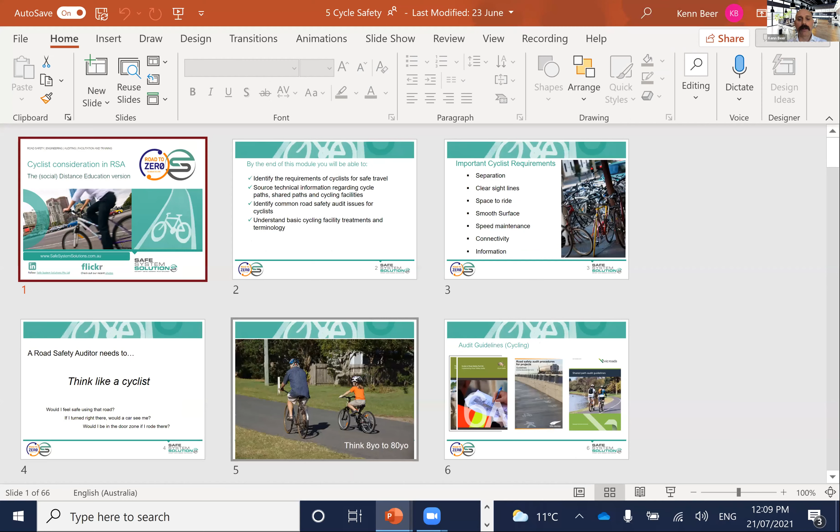Okay, I better share my screen, and of course I'm going to be asking you questions as we go. Let's start with cyclists, shall we? Right, Kathy, hopefully you can see that.

Yes, you're all good. We got a glimpse at your inbox there as well, Kenn. That was exciting. Oh, really? Yeah. 2,000 unread emails. That's good.

All right. So each of the road users, we follow a similar theme. So Austroads actually a while back set a road safety audit course syllabus, what should be covered. So we tend to try to follow that, and we tick off different road user groups in terms of the requirements of that road user group for safe travel. So requirements of cyclists for safe travel, technical information regarding cycle paths, shared paths, different cycling facilities, then into those common road safety audit issues for cyclists, and understanding the basic terminology and treatments for cycling facilities.

Now, I probably should be saying people who ride bikes, which is apparently the term we're meant to be using these days, rather than cyclists, to more humanize people who ride bikes. But it's entrenched in me to say cyclists. So forgive me if you're one of the people who's pushing for that term to be used, and I'm using cyclist.

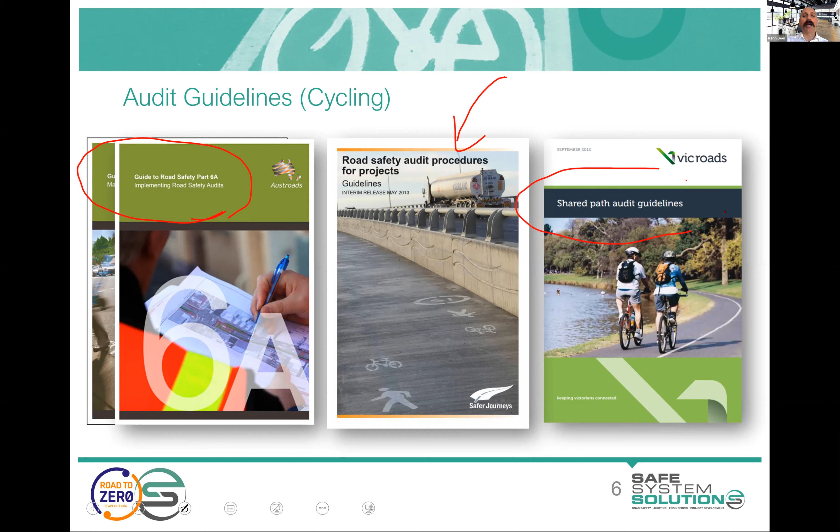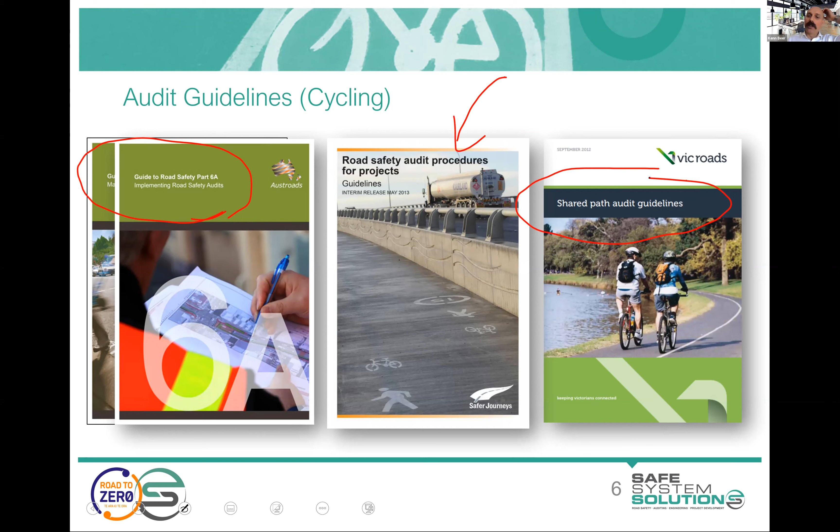In the checklists and different lists in the New Zealand document, there's information on cyclists. There's a document out there which not many people use or know about, but it's this shared path audit guidelines, which was a VicRoads document, a little bit old now, about 10 years old, but still contains some pretty good information dedicated to those shared use paths, those separated facilities, and how to audit those.

Oh, there's a wally that's up here. Don't forget to count your wallies.

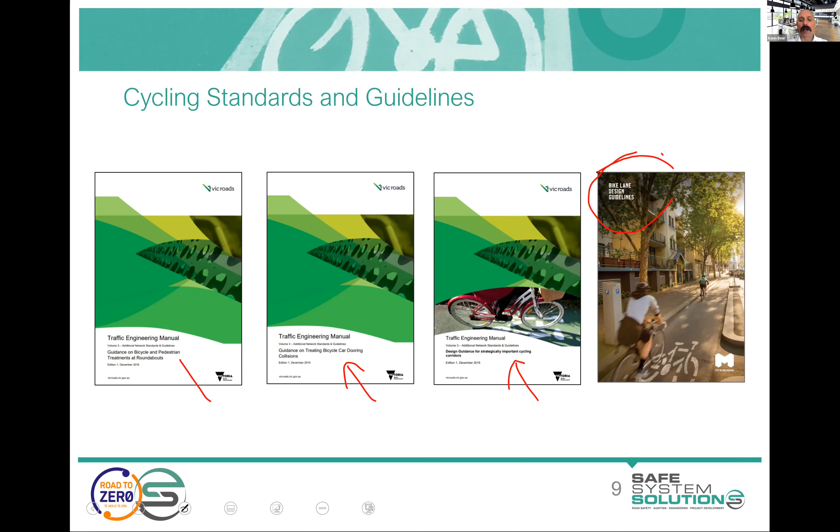There's lots of different resources, and we've put a lot of these on your memory stick and into the resources in Moodle, so you can have a look at them if you're interested. This one's bike treatments at pedestrians and bikes at roundabouts, car dooring treatments, so those areas where the doors are there. This is strategically important cycling corridors and a bit of thinking around that. Bike lane design guidelines from the City of Melbourne. There's quite a number of those that have appeared in recent times.

So we put them all in there. You can have a look at them, and no doubt there's some New Zealand specific ones that I'm not aware of, but it's luckily an area where we don't lack the guidance and the knowledge, and we're continuing to work on it.

Okay, when you're road safety auditing and you're thinking about cyclists, this is sort of the absolute 101 cycling infrastructure audit: longitudinal grates. Now, it's a bit of an existing conditions one, that you might notice in the existing conditions, and they don't appear to have any plans to change it in the design, or you might be doing a pre-opening / post-opening road safety audit, and these are the things you want to pick up.

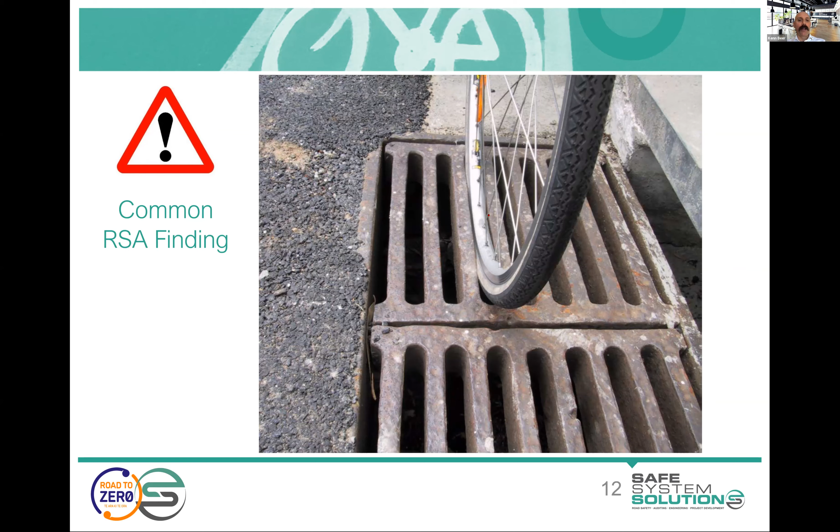Okay. And yes, as I said, there's some larger ones out there. So certainly something you could very much drop a wheel into. I'm straight into the examples here. So another common road safety audit finding is where there's new cycling facilities going in or a new cycling treatment. So this one is adding some different cycling storage boxes at the front, some threshold treatments to try to slow turning riders, some green paint to warn road users.

The issue, as an auditor, that the team picked up, was that they were proposing cycling storage boxes at the front of the queue here at this T intersection. And when you get out there on site, you discover that they operate the signals with the right turner out and the left turner in at the same time with a left turn arrow. So what we had there was that the cyclist would come down, this is what we imagine.

They'd store there to go forward, so they're in view, the drivers can see them, but unfortunately then the green arrow would pop up. Now this became quite a challenge to risk rate. We had a bit of debate as an audit team. How do we risk rate this?

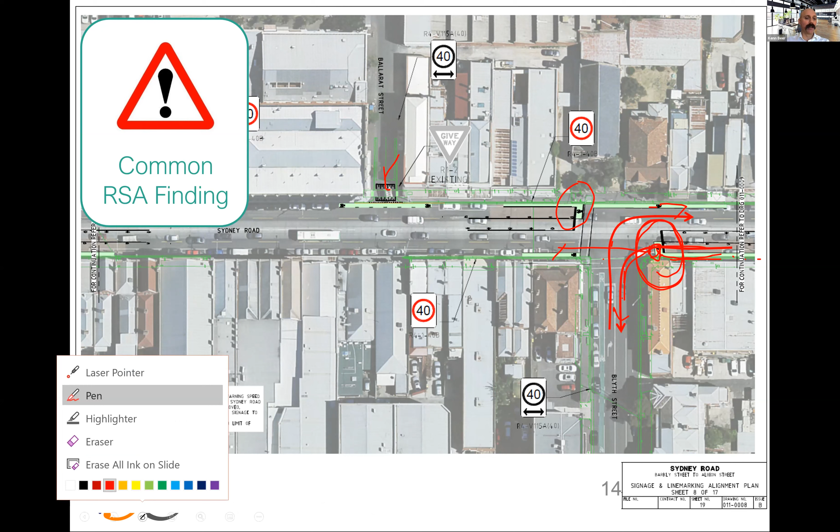And I think we agreed on a medium risk, because we decided it was pretty unlikely that a driver would not see this rider that's sitting in front of them. Maybe there's a bit of interaction as they come up and they slot in and the car's going. So that was our concern. We thought that a road rage style incident is more likely there, where there's a cyclist sitting in front and they've got this storage box and then somebody wants to turn, and that may create some dangerous maneuvers.

But trying to think that through was a challenge. I think there's a question there: is that a left turn only lane? No, it's a straight and left. So that adds a bit of comment. If it was a left turn only, then yeah, I'll show you later. You've got some options about either putting the cyclist into the middle or thinking about a holistic treatment, which is very challenging in some of these constrained environments.

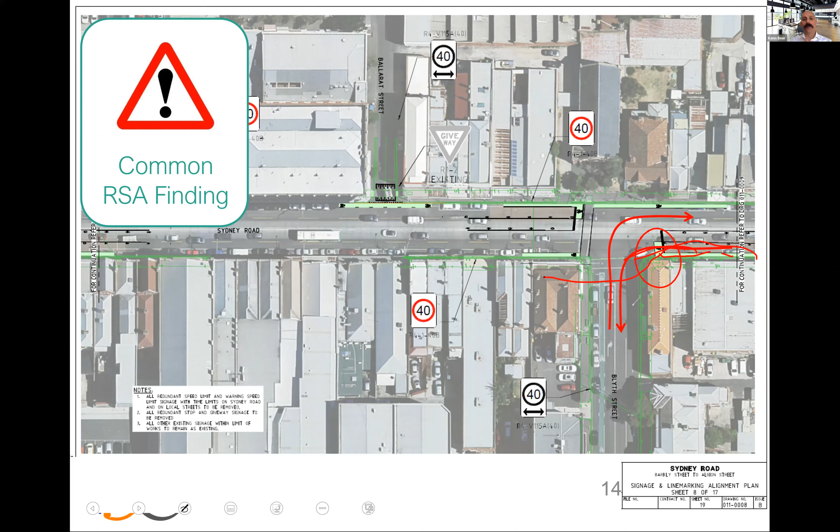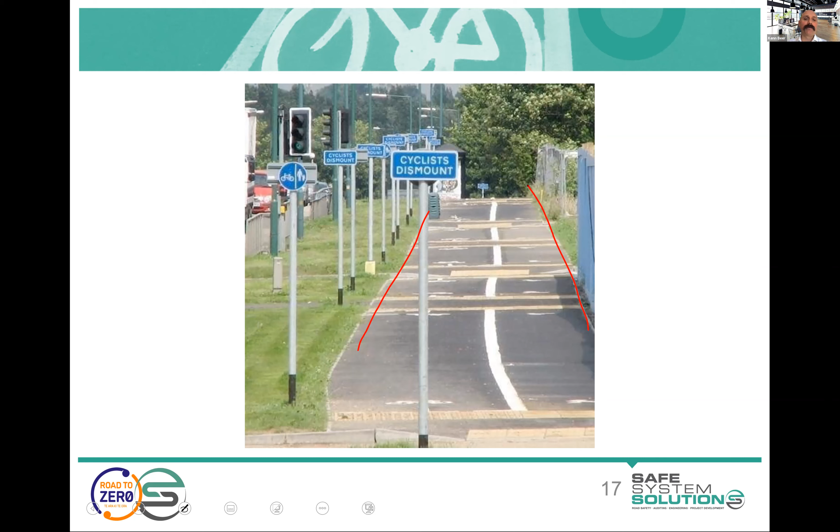So opening up those sight lines often means that there's not that requirement. You're not as concerned because everybody can see each other. The appropriate vehicle can give way.

Here's an example of a road safety audit report I did with some colleagues on a very large new subdivision being built. They provided a shared path right up onto the property boundary, which was an interesting way to go about things. Probably if that had been audited at an earlier design stage, there might have been some commentary around that.

But there were these situations with high fences and garages, and so you're going to have the cars emerging. So obviously cyclists coming down here and vehicles emerging. It's an issue. So in that situation, we would love to talk about providing that space, but cutting back the fences so there's open sight lines is a rectification measure. We call it a supporting one because it's not eliminating that issue, it's reducing the likelihood that it'll happen.

This was a really interesting one, another window into road safety auditing. The council, the local government responsible for this whole subdivision, had approved the developers' plans. I can't remember what they call them, but their standards and guidelines for subdivisions like this allowed this. And so they got this audit report and handed it back and said, listen, that's part of our structure planning guidelines, so can you remove that out of your audit report, please? It's not what we're looking for out of this report.

Yeah, there's some comments that the UK uses cyclists dismount signs like confetti, maybe a bit like that picture you showed earlier. And Lisa brought up that in Queensland they had banana rails to keep cyclists from darting onto the road, maybe around 2002 to 2008. I've just looked up banana rails, and they're no longer in use. They were bright yellow railings shaped like a banana to slow bikes down. But Mark's saying perhaps the risk is cyclists will run into the bars, doing themselves a serious injury.

So there you go. Yeah, and that's right. There's been a lot of evolution of how to treat a cycle facility on approach to a road, and certainly the use of chicanes and bars and those sort of things is very much being phased out, and either looking to provide the continuity for the cycle facility or providing essentially a splitter island like a road and clear visual guidance for the cyclists to understand that they don't have priority. But yeah, the bars are not.

Yeah, so Kevin's responding that they're still used in Napier. Okay. Napier, the home of the banana.

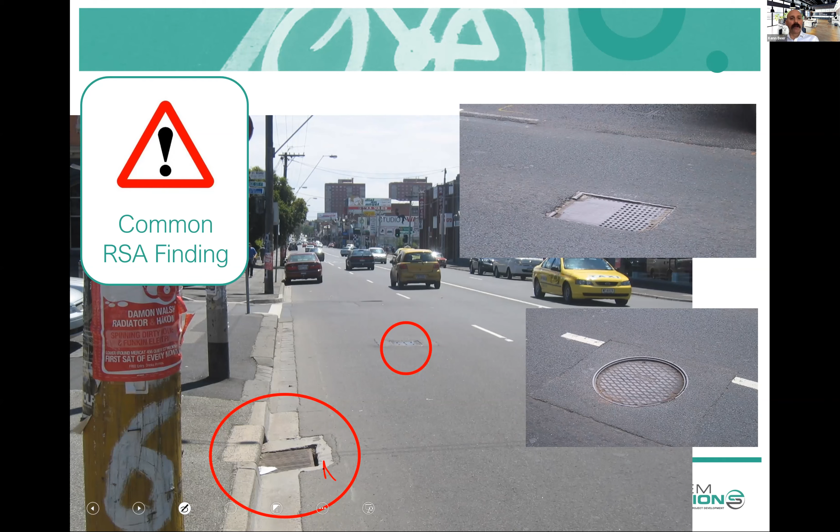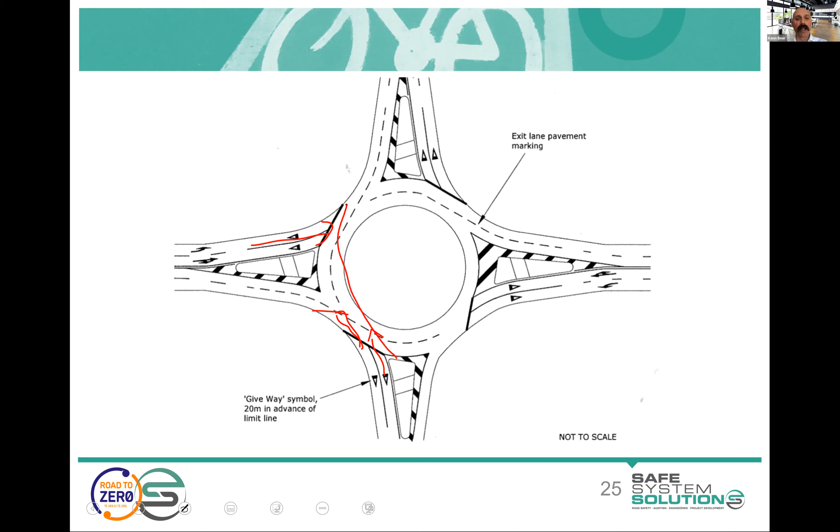So take this one all the way back to a planning perspective and try to create your cycling routes away from these major traffic routes. But we do find ourselves with lots and lots of legacy challenges. There's more innovative concepts, more of that attempt to try to provide those facilities. These are some concepts developed by some of our designers, which we put out there. This hasn't ever been built yet, but the Queenslanders are putting this into their guidance as well to try and encourage this.

But the idea being there that maybe for the minor leg approach, the cycle path can have priority through and connect back, providing these staggered clear areas slightly away. So a right turning cyclist could come in here, go up, pause, cross, pause, and off they go.

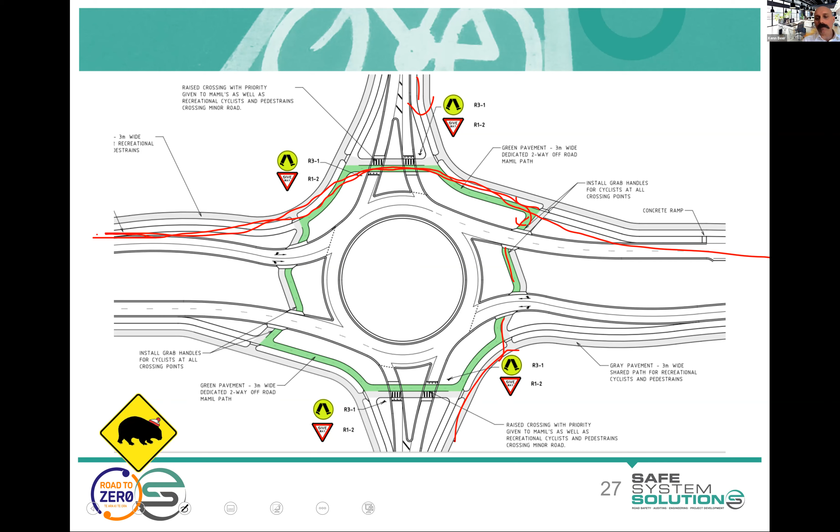So again, as an auditor, you're providing advice maybe on possibly delving down these treatments or thinking about cyclists and how they're going to go.

Any further questions come up there, Kathy? We had a comment about the sharrows. They're being installed in Hamilton City in their CBD. I think I've got that right, Janine. Just let me know if I have it. And that's about it. I'm just waiting to hear back from Kevin on a roundabout that he's mentioning. But okay, that's it for now.

Yep. Yeah, so the sharrows are an interesting one. You really do want to ensure that the speed of vehicles will be low if you're putting those sharrows in. So maybe the need for local area traffic management. I did see sharrows put in on a sort of 50, 60 kilometre per hour point on a road, which really I think is causing us a bit of concern if you're going to get cyclists claiming lanes at those sorts of speed. It was a bit of an odd scenario, but anyway.

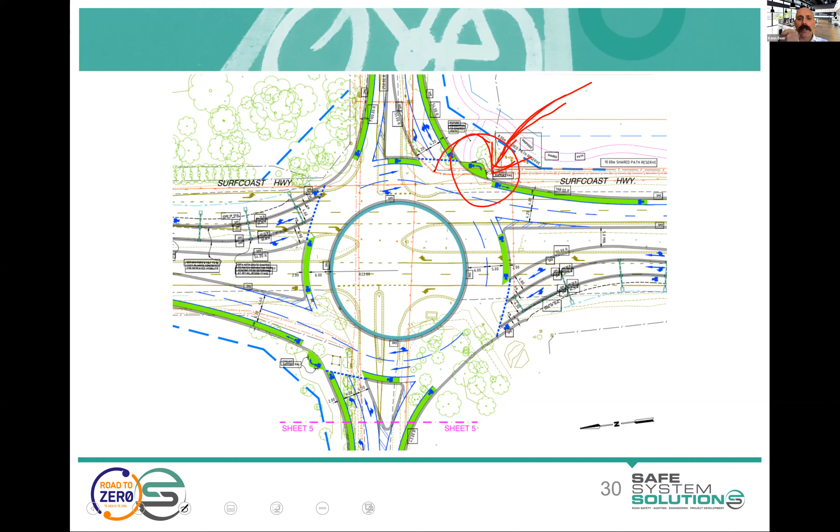Here's an interesting one, again showing the design to reality challenges that are often faced. This one, another 2-lane roundabout, and we've got the cycle lane. It's really just the shoulder comes up, but then a dedicated cycle facility for the riders going straight through, and so they're separated from all the vehicles in the roundabout, and so it all looks fairly good, well catered for. I mean, the right turn has still not got anything particular there. And then this is how it was then constructed.

And I think as a cyclist, and again, as an auditor you put yourself in the cyclist's shoes, I kind of feel that you're going to get to that and think that that's the footpath, and then, okay, I've got to go through here. So the whole purpose of that facility, the extra money and the investment, I don't think it's going to get utilised a huge amount. Yeah, they've got the cyclist only sign, but it's a little sign there, and you're riding along and off you go. So I think just a nice small bit of green paint up there would have done quite a good job to show that that is an area for cyclists.

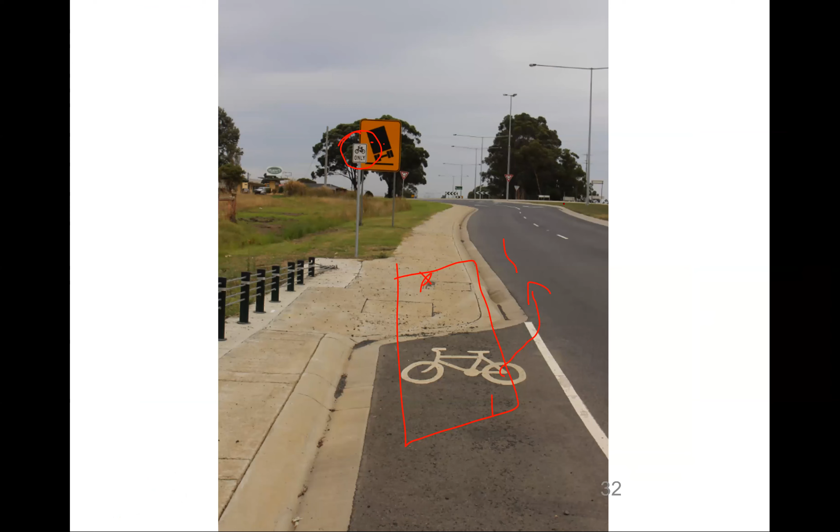Kathy, anything? Some comments are about the previous one, that it would always be covered in glass and gravel. Roundabout on that crest, that's poor practice. Not wide enough for pedestrians and cyclists, the previous slide. Yeah. And Daryl wants to know, what's your view of the classic trolley problem? Does increasing the safety of a majority justify a small increase in the risk to the minority?

Such a good question. And the easy answer, no, you try to get everybody to have improvements in safety, so you don't have a road user that loses out as such. But yes, there are practical challenges on that, and I do favour the safety of the majority, but always look for measures to try to ease the risk for that minority, and try to maybe provide facilities or restrict that minority. But yeah, that's a debate for a coffee or a beer or something, and a long discussion.

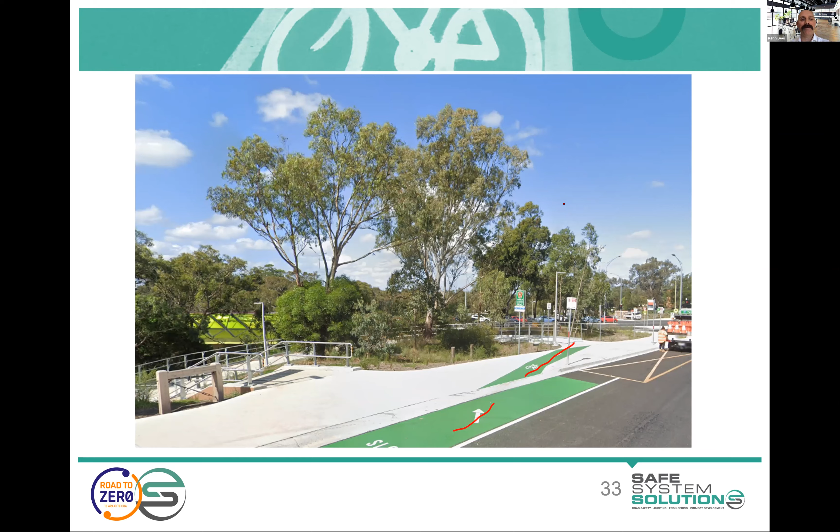Okay, dooring. Dooring is the term that's sort of raised its head over the last decade or so, as it's been termed that opening the door in front of a cyclist and the cyclist striking the door, or striking or avoiding and falling into live traffic. And that's where more of the injuries have happened, in the secondary strikes, rather than that initial door hit. But the door hit itself has provided quite a bit of serious injury.

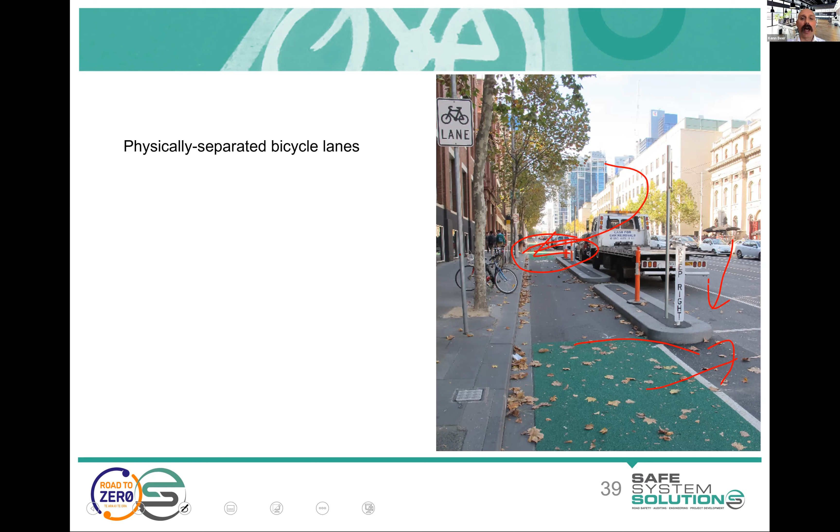Yeah. So the separated cycle facilities are interesting ones. Great improvements come with a number of challenges we need to work through, and auditing is certainly a great way to sort of highlight these issues. That turning in, the idea of disabled parking spots and ensuring that they are correctly catered for, the loading and unloading areas of goods for cafes or the like, and vehicles coming in and out.

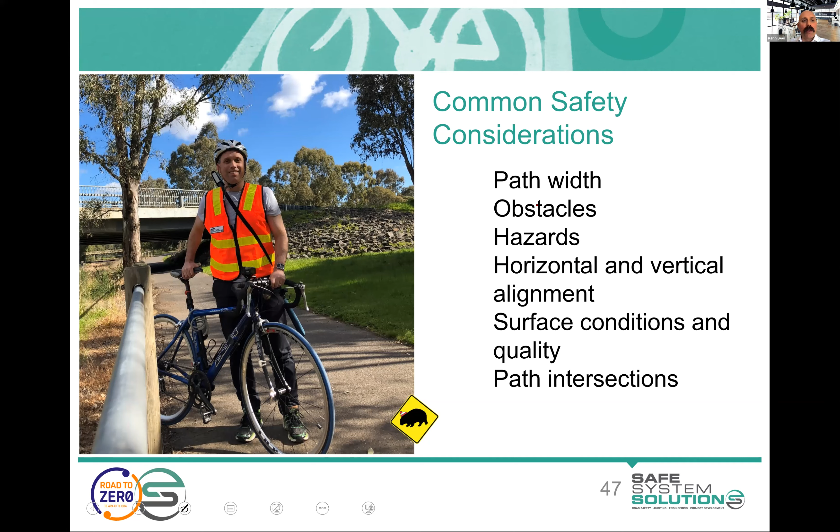So those intersection principles to think about in shared paths, and Kevin's award-winning fact sheet also talks about intersections on shared path interactions, and that was great to see. So have a read of that when you can. But you do want to provide that clear priority, good sight lines, advanced warning, the guidance, and then ideally getting to that 90 degrees, so we don't have that Y intersection challenge and confusion of priority and sight line, being able to see challenges and speed reduction.

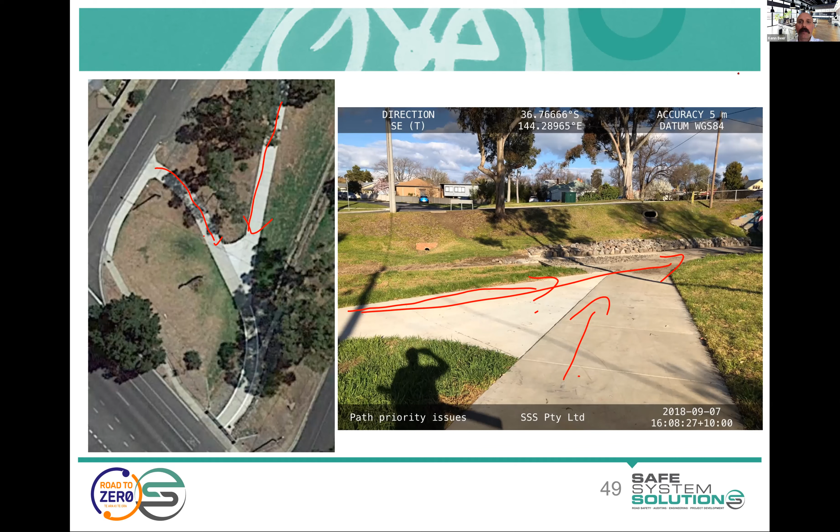Okay. Thank you. I better keep moving along, eh? Yep.

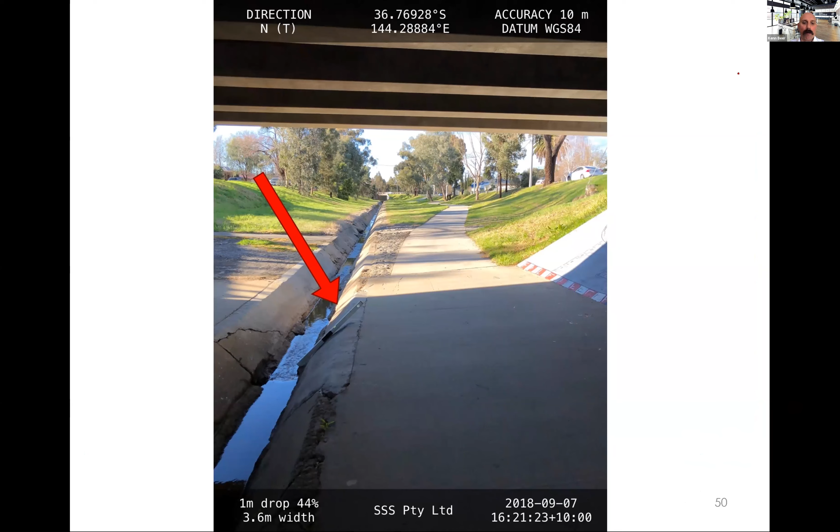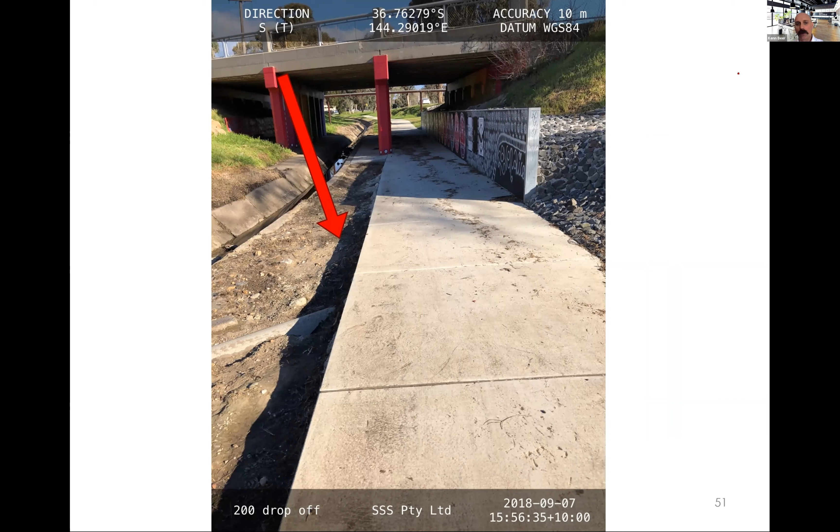Lots of examples here of different issues for cyclists, drop-offs, smaller drop-offs, but nonetheless, you've got to think about people walking dogs, kids on the path, all sorts of things that might make a cyclist have to avoid, and even hazards close to the edge. So there's quite good guidance out there on what's generally appropriate and what reduces risk, and how much we can reduce risk. Thinking about areas within the general path that could be a hazard at night as well, and of course debris and the like.

Fencing and catching a foot peg, a pedal or a handlebar. So there is specifically designed cyclist-friendly fencing. So just ensuring that is being used is important and something to pick up as an auditor. The back of barriers often causes issues for riders. Again, we've been doing some different investigations of incidents, where you'd compliment them on thinking that a barrier should go in there to separate the path from the vehicles. But you do need to think about the back of the posts for a rider that may strike that.

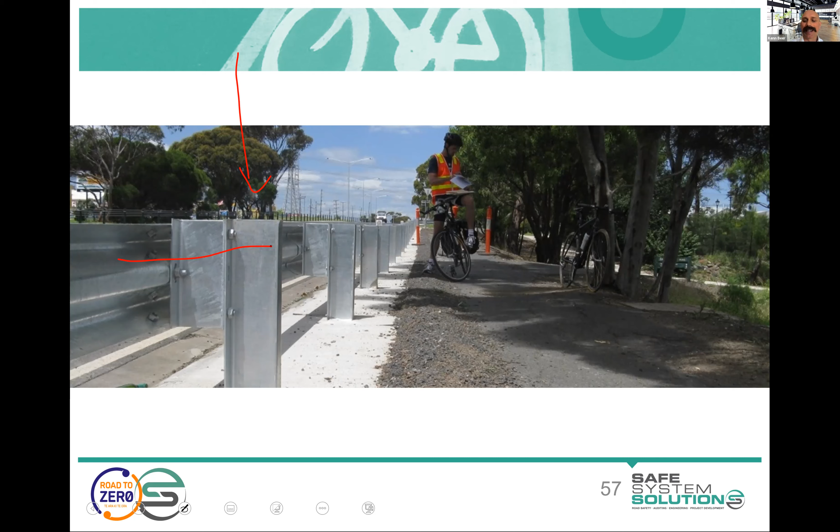And there are ways to treat that. You can put a back-to-back W-beam system on there. You can do post capping; there are lots of post capping products available. So there are things that can be done and suggested as a road safety auditor. There's some back-to-back examples, and cyclist-friendly fencing also.

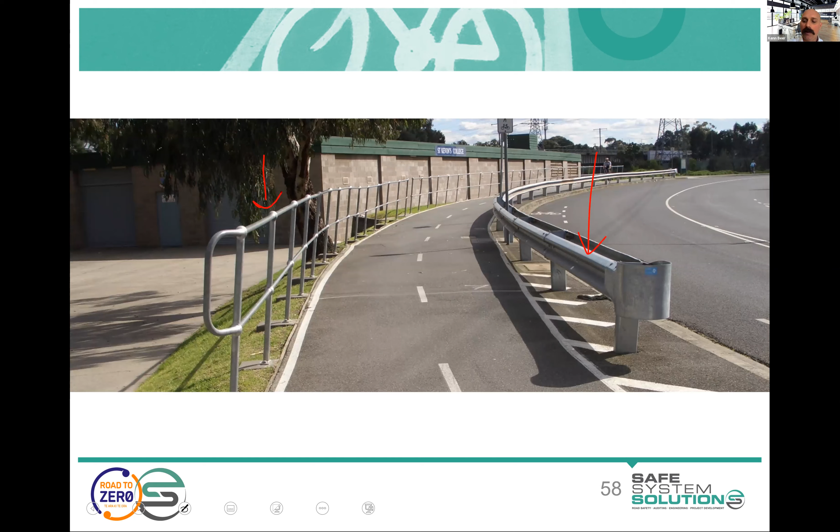So we talked a little bit about putting hazards intentionally in the path, and this is not great. Think of that at night. It's not going to be seen. The chain's not good. Somebody's probably put that there to warn other cyclists at night that there's a chain here. So we want to try to make sure we're not doing that.

I think this is quite a good example as it comes up on your screen here of there is a cable stay there, so holding up a power pole. Ideally, we wouldn't have that in the middle of the path, but if it has to be there, good line marking, some advanced warning, flexible bollards with retroreflective marking. We're in a better situation here.

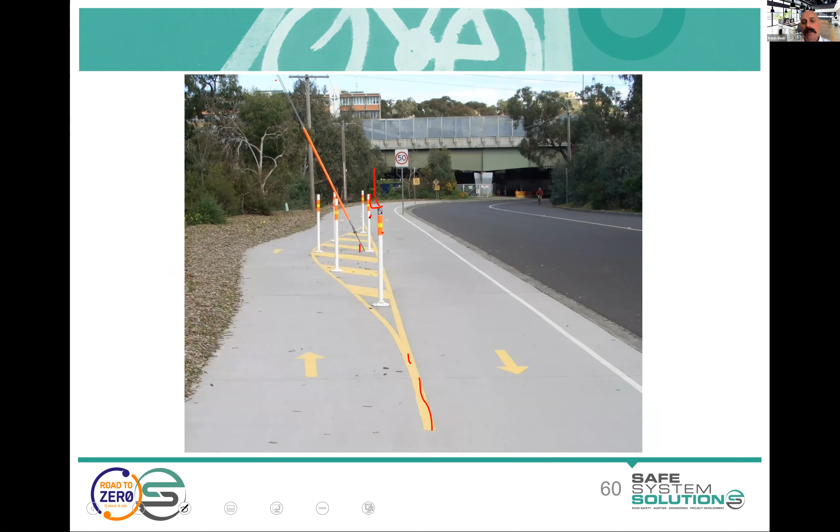And Austroads' guide, certainly the new one, is going to have these thematic road safety audit sheets in it, which we came up with to provide that guidance on. If you're asked to do a cycling audit, like a road safety audit with a cycling focus or a motorcycle focus or a pedestrian focus, what are some of the key differences and how do you do it? So we put those into your memory stick, your USB, and onto Moodle, so you can read those in your own time if you'd like. They've got some more information.

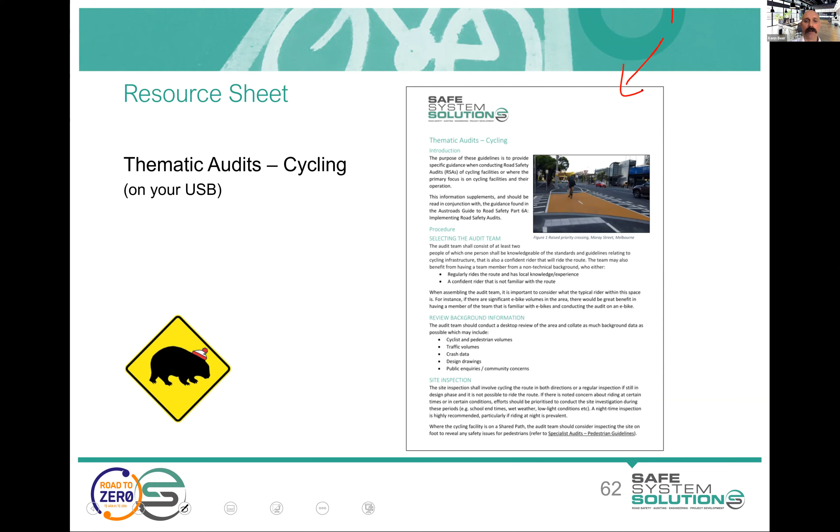Okay, Kathy, anything come up that I need to deal with? Are we going to have a quick break? We are going to have a quick break because okay,

this is about is it compulsory to wear a helmet on a separated facility in countries where helmets are compulsory on the road? Yes. And I believe Mark sent through the legislation on that, so I won't read all of it just at the minute, but I think the short answer is yes.

Yep. But yes, let's have a quick break. And so what do you say, 2 minutes? Quick break, because I got to get through motorcycles and then we've got to explain the activities. Yes, great. 2 minutes. Right. 2 minutes. Thank you. Thank you. So I'm just reading through some comments there. Yeah, some good comments on the details of some of the examples and a few other things. So thank you for that. It's a bit of a challenge online, you want to have a bit of longer conversation on different topics. Nonetheless, let's keep ticking along here.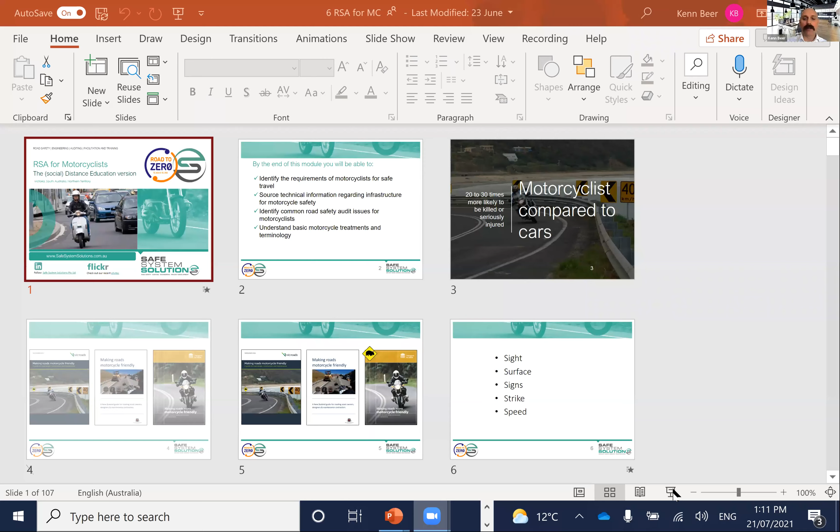I'm going to share that, and we're going to jump into motorcyclists. And again, one where the New Zealanders have done quite a bit of work over the last decade at least in terms of upskilling engineers, traffic engineers or designers in the needs of motorcyclists. And that's been a wonderful thing. Some of this you'll probably have seen through different presentations or through the Making Roads Motorcycle Friendly documentation that New Zealand has. But we're going to again talk about the requirements of motorcycles for safe travel, technical information regarding the infrastructure, common road safety audit issues, and the basic treatments and terminology.

A motorcyclist is 20 to 30 times more likely to be killed or seriously injured, depending on which bit of research, in comparison with passenger vehicles. So certainly the most vulnerable road user from that perspective.

And here are the documents available to try to concisely talk about infrastructure for motorcycle safety. So this is the VicRoads one, which I developed with some colleagues quite a few years back. That's actually the second version of it. And the New Zealand one, which came along a little bit later, that's the one that you can find on the Waka Kotahi website. And it's replicated in a few others.

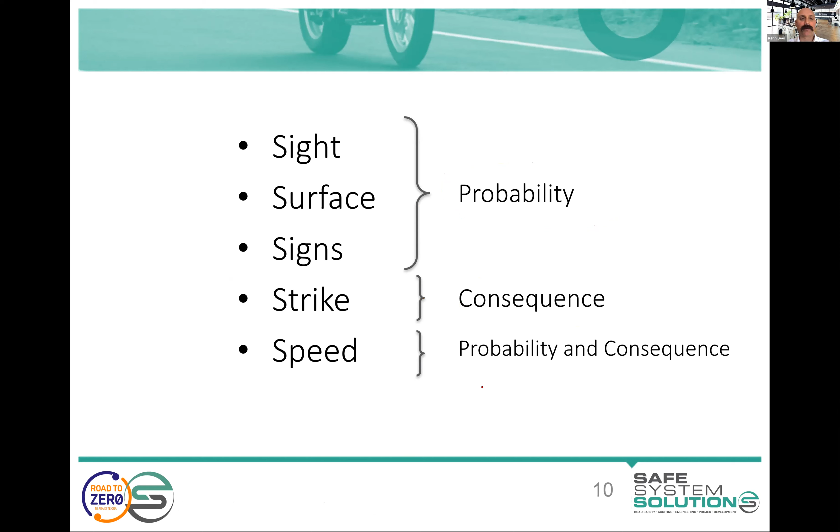You're all quite good on the risk, probability times consequence, the chance a crash will happen, how bad it's going to be. And as we categorize these, the sight, the surface, and the signs are the chance that the crash happens. The strike is that consequence when it does happen. And the speed is both. Less chance that the crash will happen, won't be as bad if it does. So I go through these in a little bit more detail in others, but I'm going to move quickly through this in order to give us time to give you that assignment.

If you're looking at the size of motorcyclists and thinking about the issues there, obviously even compared to small cars, with motorcyclists we're dealing with a much smaller size. We add some safety margins there for motorcyclists.

First one to pop into the chat, why those safety margins are quite large. Any ideas? I'm just going to pause for that. Yes. Andy's going to get that unless somebody else puts something in. Yeah, okay. We will give it to Andy. He clarified it.

Initially talked about wobble room, and then clarified it with lean angle. So Kevin was closely following with lean angle. But yeah, it's all about that lean angle as well that you need to take into account as a rider goes around a curve.

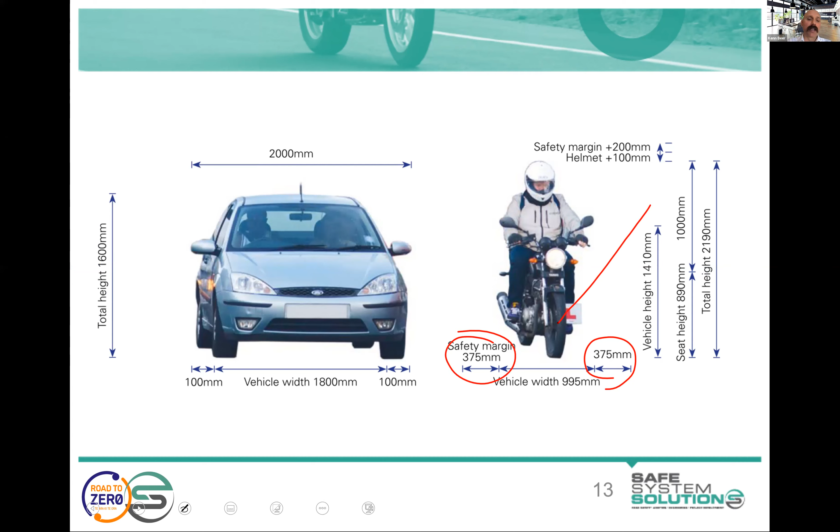Now, does anybody know? In fact, I'll give another prize out there. The person who can tell me the official name for this curve, the curve that tightens. I didn't even finish the question, and Kevin was on to that compound curve. We might have to put a hold on prizes for Kevin for this session. I think he's going berserk here.

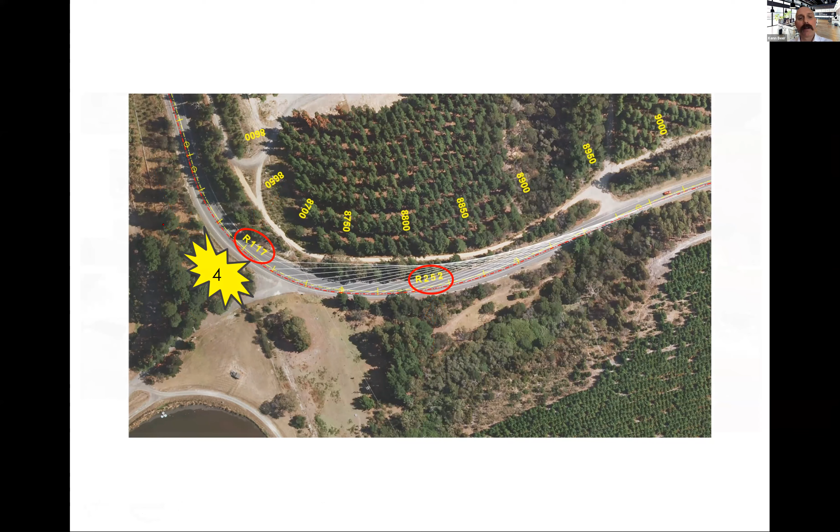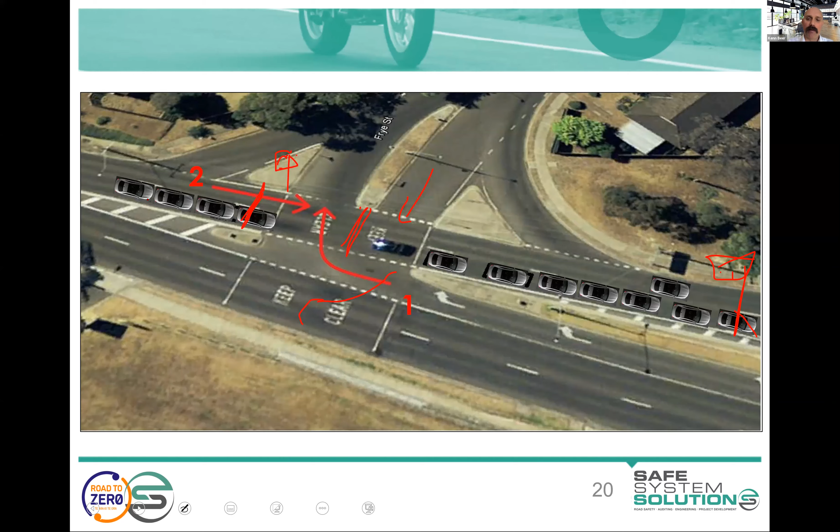Again, just talking a little bit about the motorcyclists being a little bit hard to see at intersections. Thinking about that in your auditing.

And surface challenges. So certainly the lean of a rider and the two small contact patches means that any surface issues are far more challenging. We really do like to think about the surface issues on the approach to a curve and through the curve. Once the rider's out, surface is still important, but these are the really hazardous points, in and through.

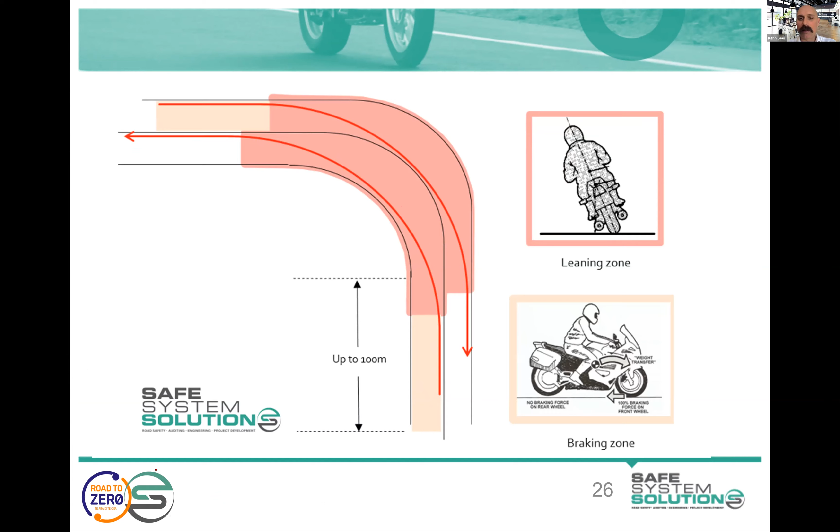I mean, I'm a licensed motorcycle rider, but I would never call myself a motorcycle rider because I'm just scared to get out there really after spending so much time dealing with the issues and incidents. But I do get some experienced motorcyclists tell me they don't like the specific lines on these, so we might have to fix those. But we do want that consistent, good surface.

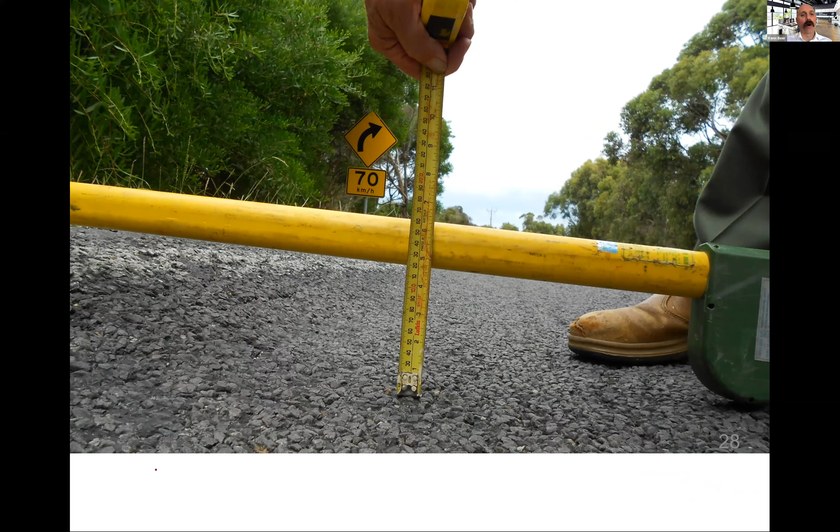So all sorts of challenges out there, though. Depressions in the road can mean that a rider may just lose their traction as they sort of bounce through a depression, especially on a curve. Different potholes and different things, especially around curves, are challenges. Just showing lots of photos of roads that are absolutely stuffed there.

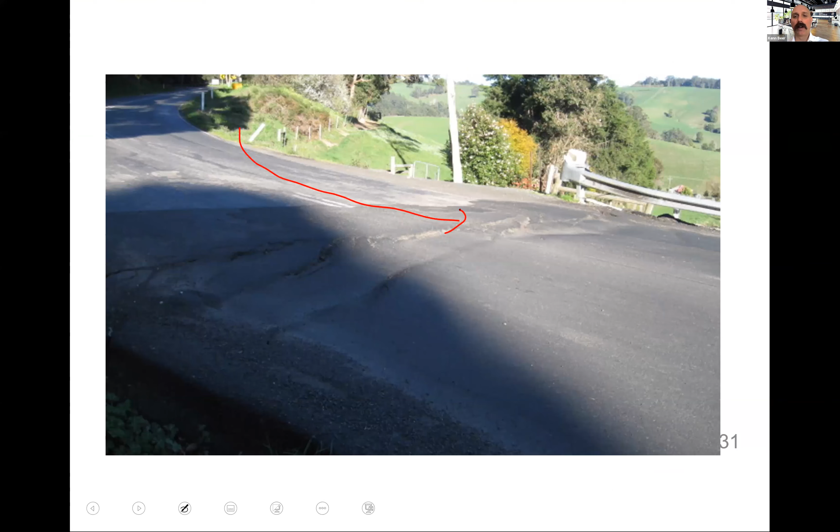Thinking about gravel wash, mud that washes out onto the road from work sites, construction sites, and thinking about that for riders: scooter riders, cyclists, motorcyclists, all are going to be more susceptible to those surface irregularities.

Thinking about patching and maintenance works and how they're done and where the seams are in the joins, often we're finding that the patches will start to break up around the edges, which is right in the line for a rider. So ideally you do full width patches, but there's some cost challenges there. And this one, as a rider comes around on this very popular motorcycle route, they encounter this. So we need to try to get them right in the first place so they don't break up like this, but warn riders until it's rectified with lots of signage, lots of warning.

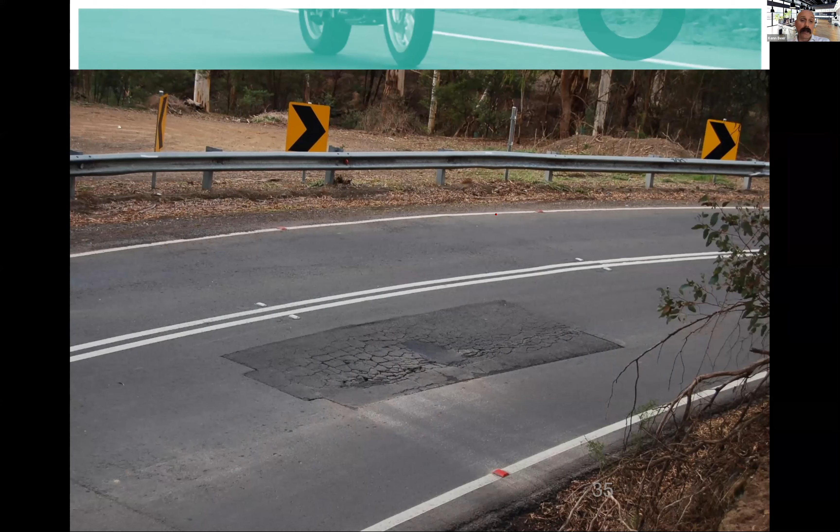Steel plates get slippery. Looks very obvious to us with this nice photo, but you think about that maybe at night when the rider's following a truck or something. Maybe it's raining. They may not see it until they're on it and hitting it and sliding. So they can get skid resistant surfacing. You can get higher visibility surfacing, and it can be a bit better. This one's interesting. Looks like the pins are coming up, the bolts.

So obviously the surfacing, you can do lots of things, water blasting, different surface treatments over the top. Here's one which is improving the surface skid resistance on the approach to the intersection, through the intersection where conflict is more likely to happen and riders are trying to avoid or brake hard, but not so much on the bit once they're in a lower risk area.

And sealing right up to the barrier is desirable. Certainly a rider going too fast in hits an unsealed surface, they really have to pull the bike upright. That's their only option because the traction is lost. So sealing right up to barrier for motorcyclists on popular motorcycle routes is quite important.

A comment came through about an interesting issue that was found on a popular weekend ride around a peninsula. If ridden in the anti-clockwise direction, motorcyclists are always on the inland side, therefore subject to debris from cliffs or steep driveways sitting on the shoulder or the lane. There you go. That's a very interesting specific there. You could have a road rule, clockwise only for motorcyclists.

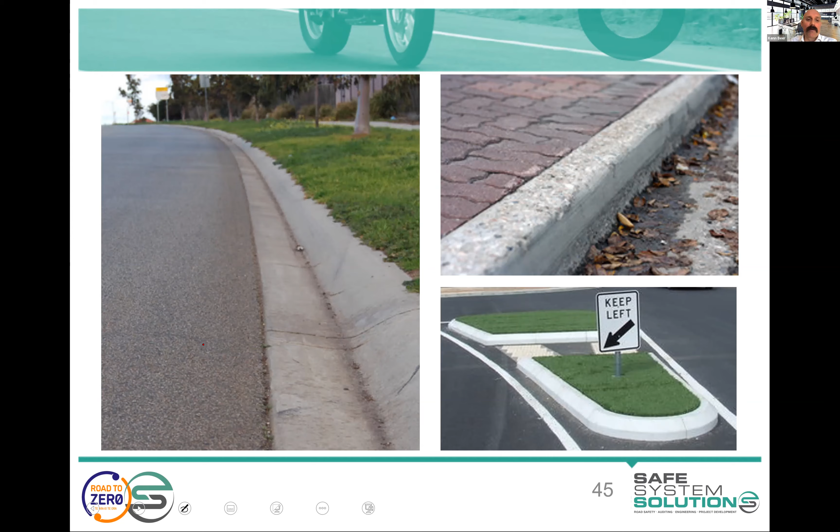Yeah, good one. The type of curbing used: obviously, the more mountable the curbing, the better for motorcyclists, although we do need to use different curbing in different scenarios for drainage and the like. But if you can make it more mountable, it is better. Here's just a little video. I think the roundabout here is quite good, quite well highlighted, but it shows how small a lip can destabilize a rider.

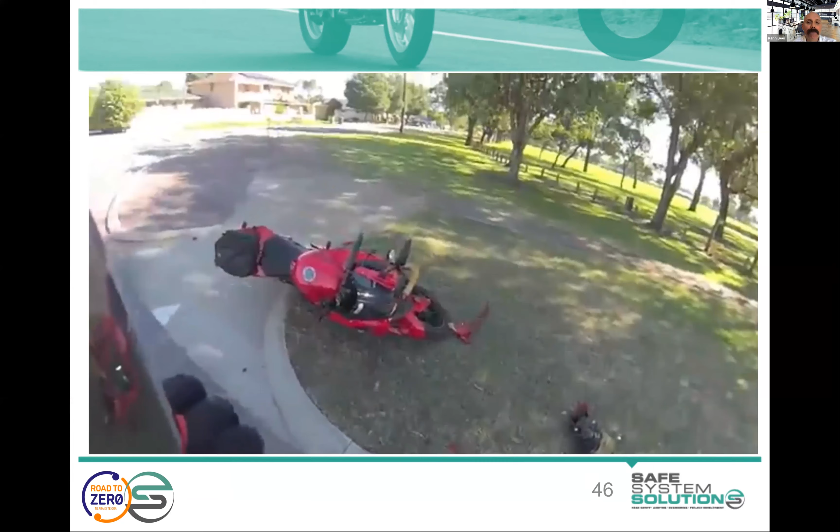And then they've gone into the grab rail there, and yeah, just those very small surface changes destabilize riders. Now there's inherent challenges with motorcyclists. Very small little mistake there, and everybody's making mistakes, but you can see how it can start to escalate. Luckily on that one, obviously no injuries, but you can think how bad that could be.

Surface, so line marking: large swathes of thermoplastic line marking become slippery. And I can almost guarantee if you get into doing lots of road safety audits, you will see a design that'll come across to be audited where they want to paint a massive stop sign or give way sign right at the intersection because there's been crashes, overshoot worries. And the idea is nice, but the reality is we're now providing a big skid resistance issue or a slippery area right at the point that's really critical for a motorcyclist.

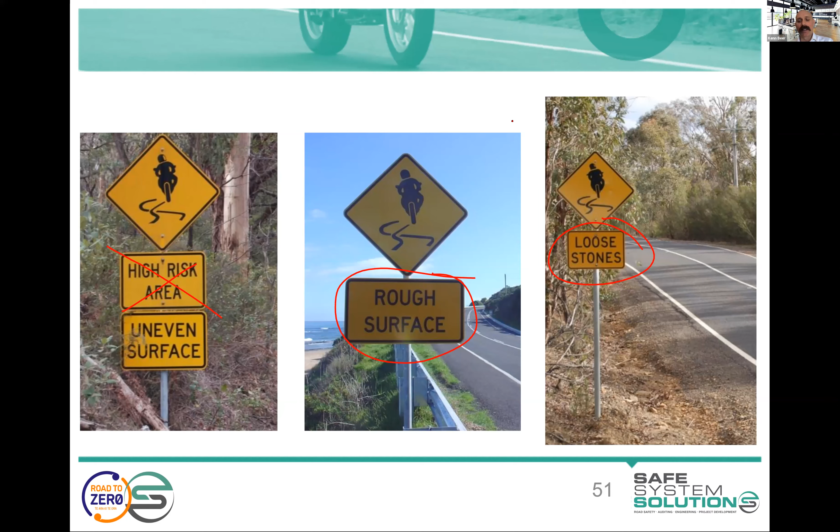If you can do it, you want to ensure that you're using skid resistance tape or line marking. The challenge is over time that wears down and polishes up and becomes a bit slippery. But I think that roundabouts are a safer area for motorcyclists, not as safe as they are for passenger vehicles for a number of reasons, and surface is one of them. But I still think that it's probably the right thing to do in a lot of circumstances for everybody's safety.

Okay, let's talk about strike. Moving along quickly, and Kathy, if you can bring up the Word document and 2 PDFs to be prepared for the explanation, that'd be good.

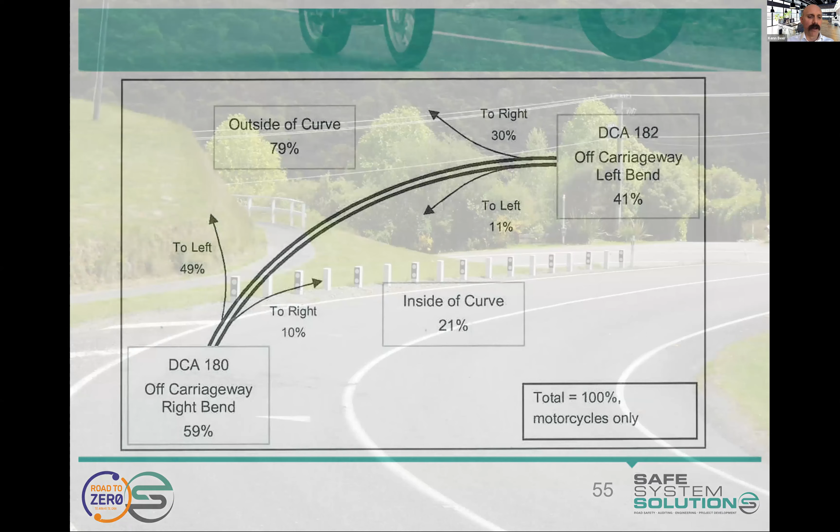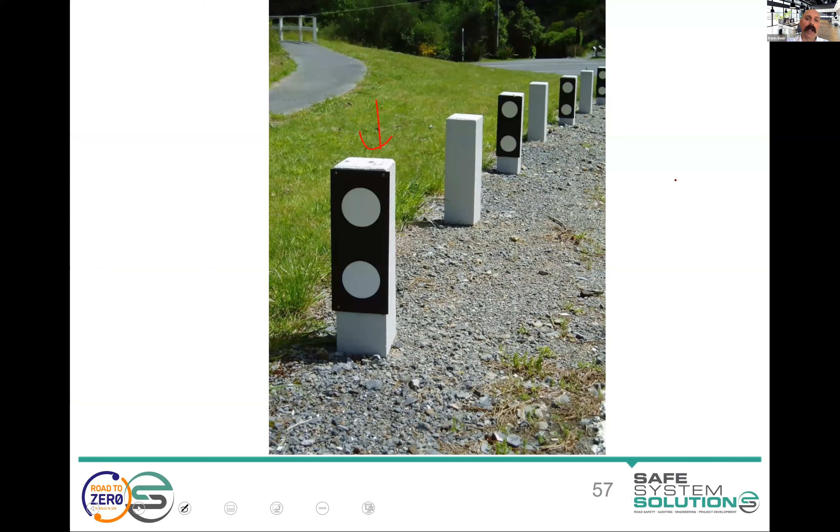riders. So we need to think about what we're putting on the outside of curves, and all the galvanized steel posts we have out there. They're all deemed frangible for a passenger vehicle, but if a motorcyclist hits it, it's easily strong enough to kill the motorcyclist. So you've got to think about where you're placing signs. Do we need both of these signs? Could we do one in the middle, lower the risk?

And then maybe on popular motorcycle routes, providing some of the more flexible sign ranges available. They usually come with maintenance challenges or cost, but we've got to think about it. But do you need some of these signs at all, like that one? Would be a question to ask. And here's one of the many low mount products available. You can have a look at that.

But as an auditor, you're going to want to know a little bit about, is this a really popular motorcycle route? And so should we be suggesting that, or is it for low volumes of motorcyclists and we maybe don't need to suggest as much of that because the risk is lower? Thinking about road furniture close to the road, and thinking about riders leaning and the like. There's a staged photo of a motorcyclist leaning around this curve to show that they lean in there.

And of course, in terms of that roadside, we like road safety barriers to protect road users from hazards in the roadside, but obviously they are designed specifically for cars, not motorcyclists. So then we can do the underrun protection, the rub rails that are available to stop riders hitting the post.

And so you can imagine sliding along at 80 kilometers, 70 kilometers an hour or something, hitting one of the posts, you're going to be in a lot of trouble if you come off the bike. And hitting a rub rail, still not going to be friendly, but going to be friendlier because you slide along it and dissipate your energy over time. And obviously these can be retrofitted to existing W beams, lots of products available.

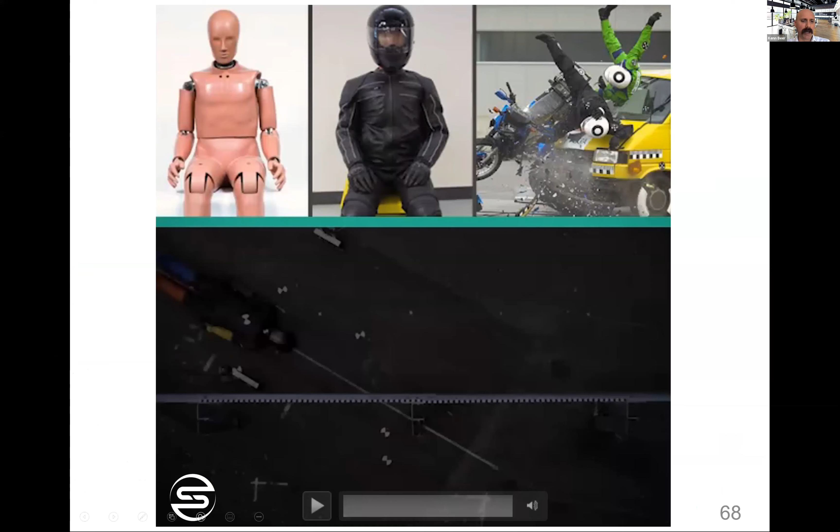And I think I showed this video in the Safe System Assessment course, which many of you did, but I'll play it again. There's a European crash test motorcycle dummy into barrier, so straight at the post, and between the posts you can see that the underrun protection provides a friendlier outcome, and the post itself, hitting that post, is not a friendly thing whatsoever. And they're at 60 kilometers per hour, not even at what a lot of riders are traveling at on some of the touring routes.

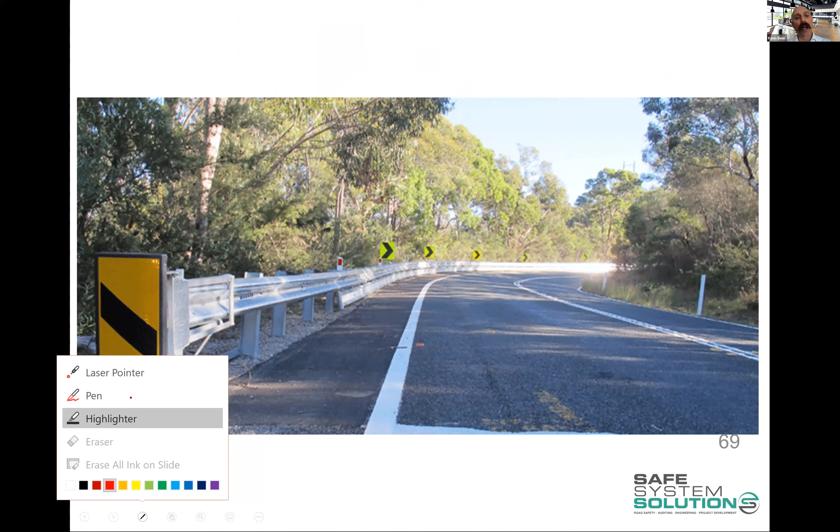Yep, so protection there. Again, as a road safety auditor, think about any times that things might be improving safety for one road user but could make things worse for another, and try to highlight those and maybe think of some solutions. So certainly, again, that's why we don't put the underrun protection on the end terminal, because it's unsure that the end terminal will function correctly if struck. So looking out for those little pieces.

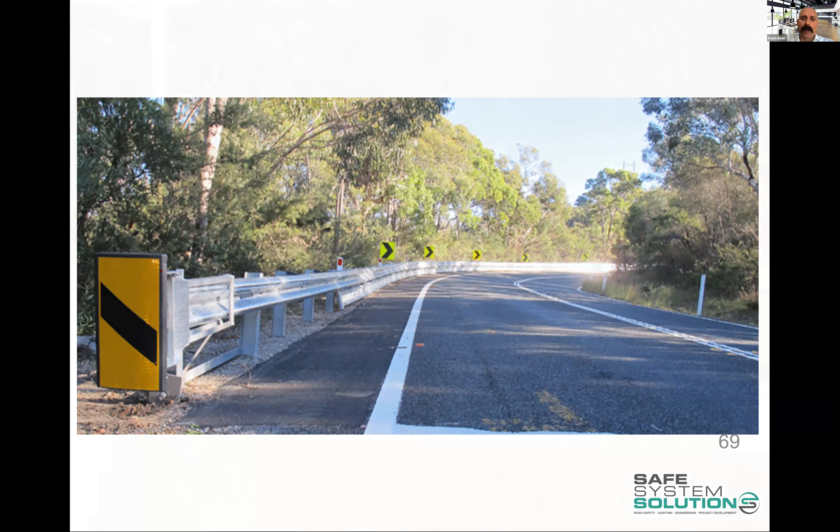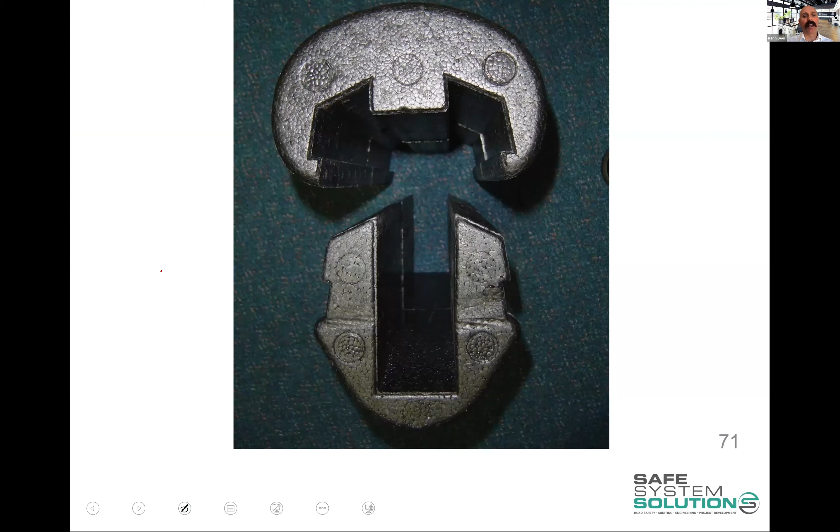The wire rope safety barrier, really generally not a major issue for motorcyclists, even though the motorcyclists will argue. And the reason for that is the positions that the wire rope is used is generally on straights or very light curves. This is probably one of the highest curved ones you really ever see. You can get post padding for these. I don't think that's actually approved for use in New Zealand. I can't remember. Somebody will be able to tell me.

But these are going to do something in some crash scenarios, but you're still trying to absorb the energy and dissipate it over a very short period. The football goalpost padding idea only works up to a certain point. The ideal would be to redirect energy along.

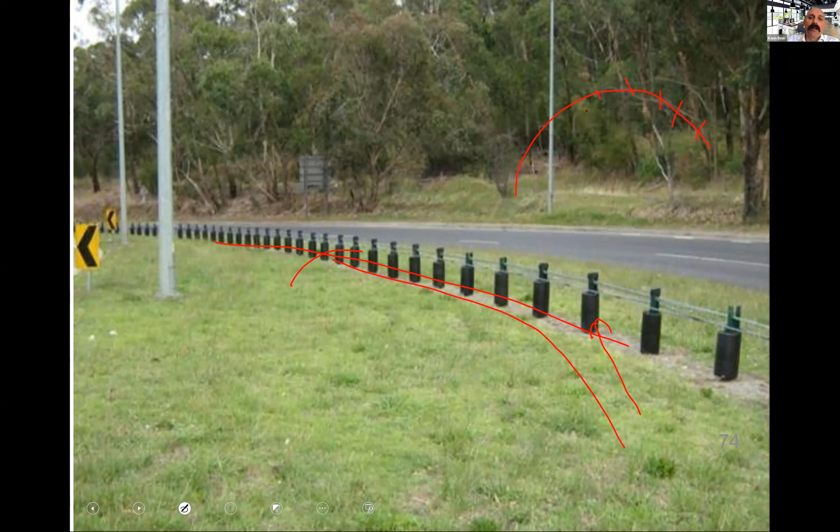But wire ropes tend to be used in long, generally straight environments, because you can't put a wire rope on a sharp radius curve, because you tension it up at both ends, it pops into the middle of the road and bends your posts over if the radius is too much. So 200 minimum, absolute minimum for wire rope systems, a 200 radius curve.

So on those popular motorcycle touring routes, you're unlikely to see wire rope systems, but we don't have any good solutions or anything better than trying to do the football goalpost padding style. And this one was a job putting in a central barrier system. This was probably 10, 15 years ago now, on the road down to Phillip Island, where the motorcycle Grand Prix is. And it does get a lot of motorcyclists going to view and watch, so it's a very popular motorcycle route.

And we were putting a central wire rope system in, and the road safety audit team suggested the use of the stack cushion around the posts. So we did that for 5 kilometres, which cost us an absolute fortune because they were $45 a unit. So you can imagine how much that cost. And that's probably fair enough. Now, if I was designing this, every time it would be a back-to-back flexible W beam, back-to-back Ezy-Guard with underrun protection every time. That just didn't exist back then. And some more examples.

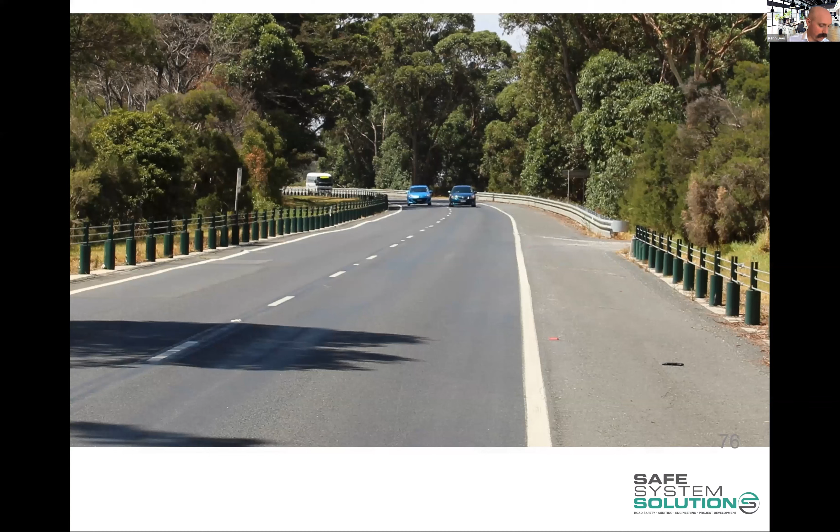Questions, Kathy? And how am I going on time?

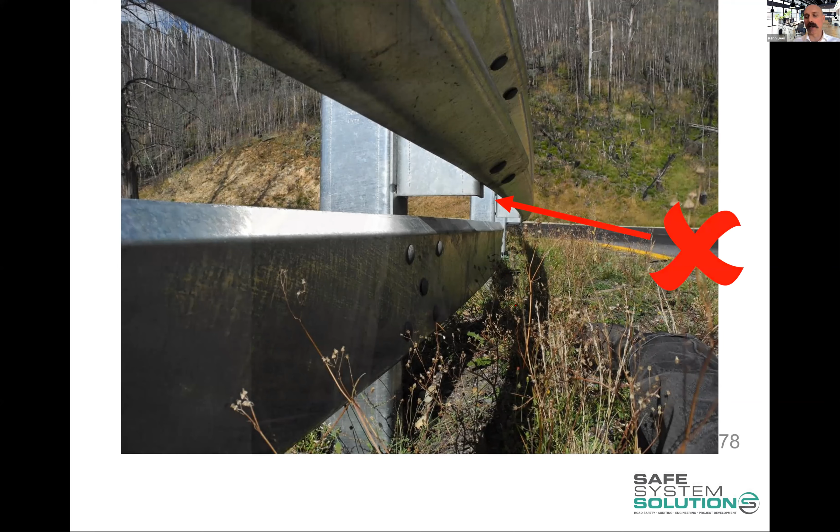Just a couple of little tips. The rub rail should sit out from the barrier system. Sharp bits and areas where a leg or an arm can get through: inevitably, the motorcyclist's leg or arm will go through those spots. So try to fill gaps underneath and think about how a rider would slide along an area. So, these aren't ideal.

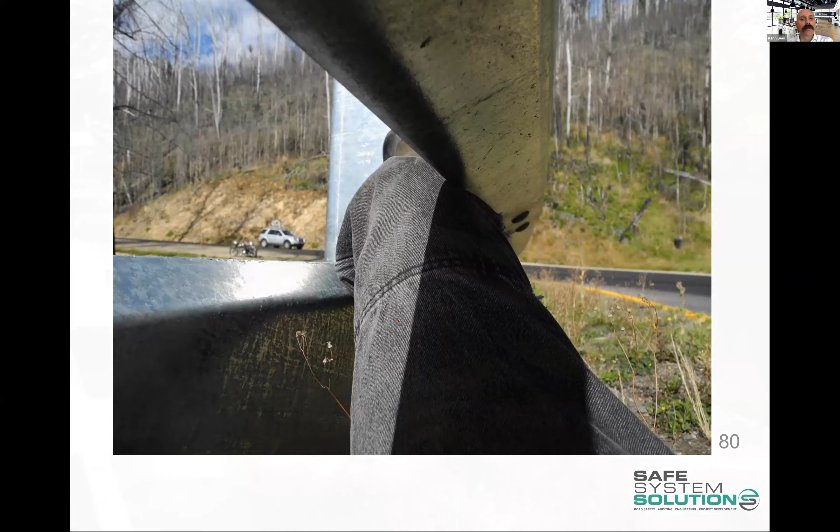I'll finish off with speed. So speed, obviously we can influence the speed of riders in a variety of ways, the same way as any other road user. But good delineation, the use of chevron alignment markers, trying to give good guidance on what the curve is coming up and how sharp it is, and helping out from that informing perspective.

The use of advisory speeds and correct advisory speeds. So undertaking your ball bank indicator runs through and getting that right. The consistency is an important one. Consistency along a route to ensure that a rider doesn't approach one 35 advisory and then the next 35 advisory is a sharper curve or something like that.

And again, motorcycle specific audits where the audit team has a motorcycle rider with them, and they ride and talk and give feedback to the audit team, and the audit team's looking as well. It's a nice rounded motorcycle specific one, and that's the kind of thing you'd be doing on your very popular motorcycle routes, on your Coromandel or, what's the other one called, Big Hill. Can't remember. Anyway, all the routes.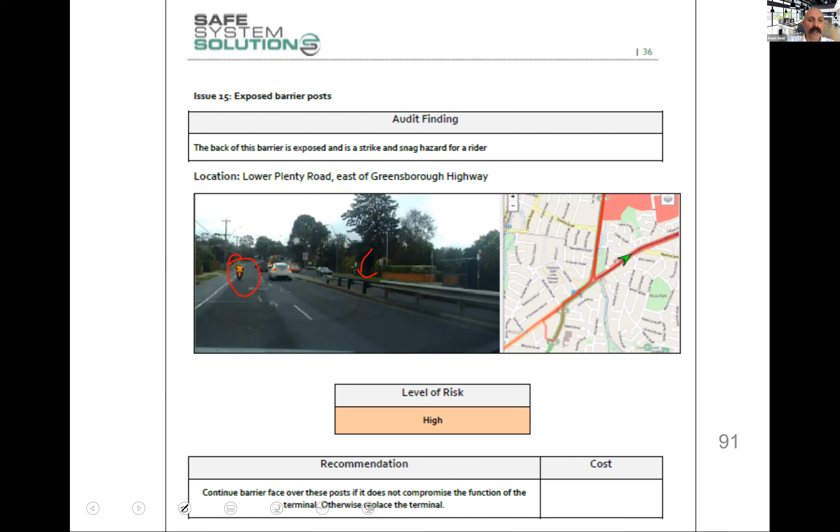And then this is where you see the riders out there with a microphone in the helmet talking to the trailing car with a driver and some auditors, and the rider was pointing out something. The auditors were looking at the back of these exposed posts, and you get a nice rounded audit. And of course, we've put in one of these fact sheets on motorcyclists. So there's this one, cyclists, but there is one on motorcyclists in your USB.

Do I have time for one case study? I think I might have time for one case study. Rimutaka Hill, thank you. Errol gets a prize. Oh, fatality yesterday. Jeez. Okay. Yep. Unfortunately, it doesn't surprise me because it's got all those characteristics of speed and the vulnerability of riders, and we're continually trying to do things to improve it, but a big challenge. We'll just do one quick case study.

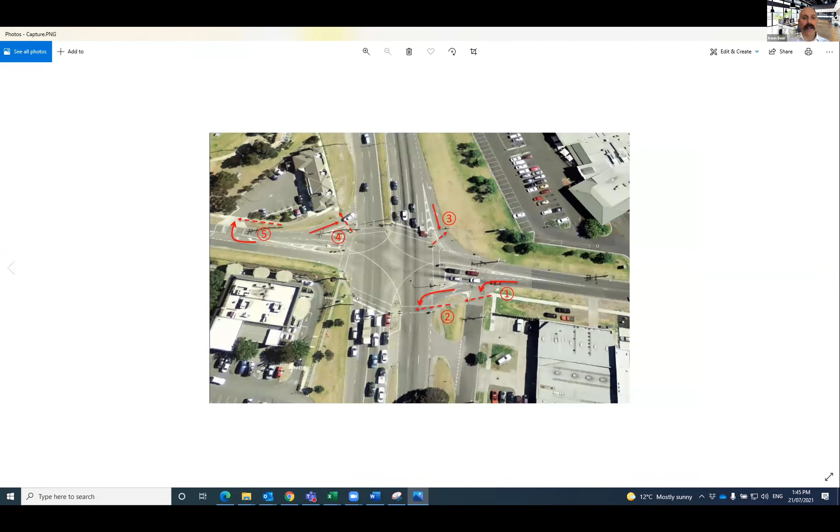Now, Kathy, I can see the assignment from the pedestrian one. So that was the picture you showed last time. Yeah. And I didn't quite get it in the 3 minutes in the session, but that's the after. Oh, yeah. I forgot we were going to show that. So you can see the, sorry, before. Yeah, rectification of the crossing. Instead of into that other area, now it goes into the island, and I have not heard of any pedestrian incidents at that location, but the issue was removed.

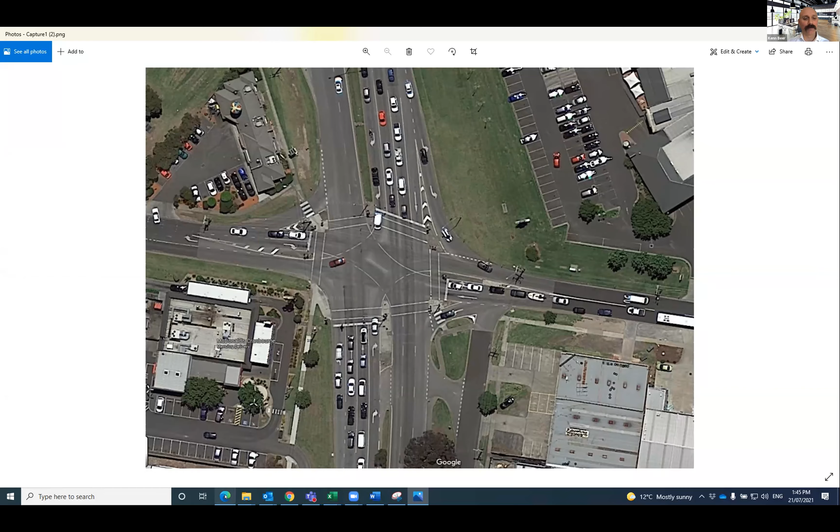Okay, here we go. So your assignment is to do a little bit of auditing, but we're going to let you do it from home, a little practice auditing. And it's in module 3 there. And you'll see down there, we've got the writing road safety audit findings.

Click on that. And then you've got 3 documents in there, 1 Word document and 2 PDFs. Now, the first one you can look at is the Word document. And this is what you'll get. The first page gives you instructions and says you're going to do a road safety audit, or a bit of mock auditing of the design, the functional design, which we've attached as a PDF, of the conversion of an existing roundabout to a set of traffic signals. So that's what you've got there.

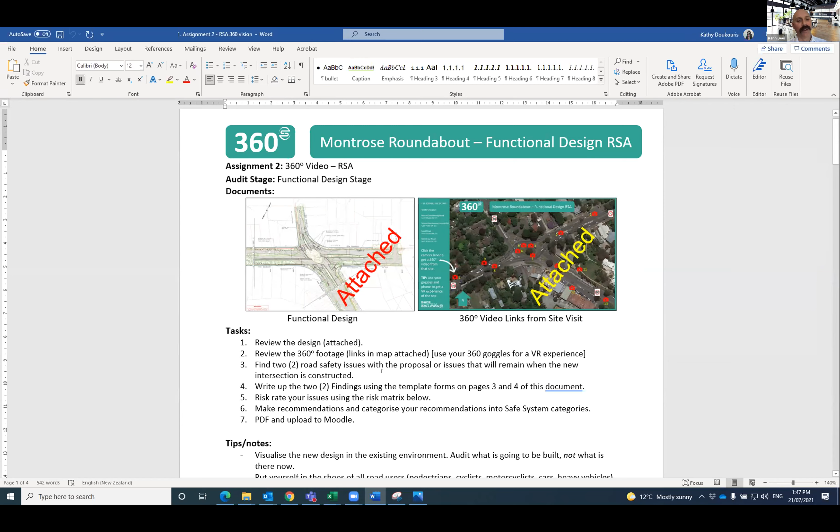The other PDF that you've got gives you access to do a site visit, a virtual site visit. I'll show you that in a second, but that's how you're going to get some vision from the site. You're going to look at all of those, and then we're going to ask you to come up with 2 road safety audit findings, only 2. I know some of you are going to want to come up with many, many more. If you really want to, you can, but they're not going to get read. Only 2 are going to be looked at, and your first 2 that you put in. Now, we are going to give you some time to do this, so don't get too concerned.

Kathy can talk about that, or we're not. Kathy's giving me the look of nope. Anyway, so

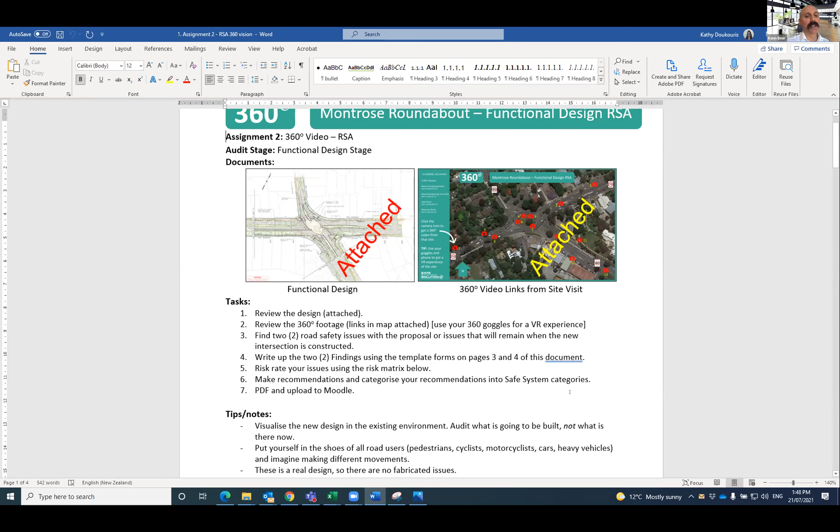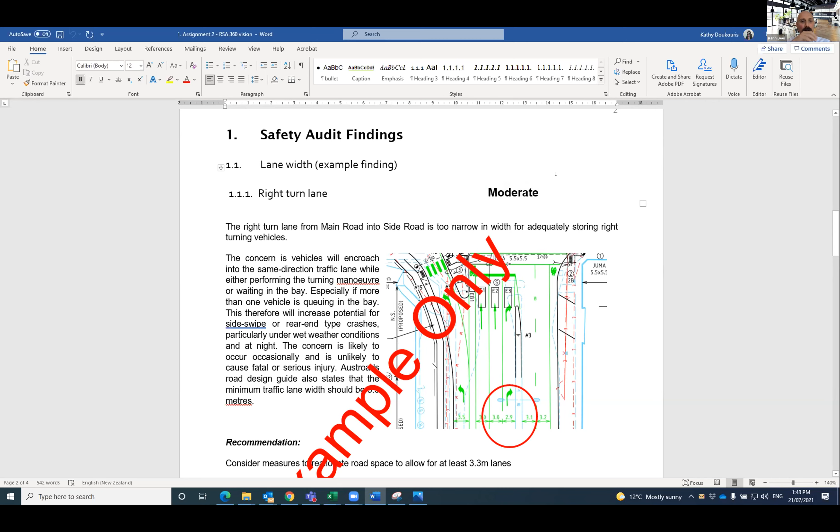you're going to make some recommendations. So write up your audit finding, make some recommendations. If you go down a bit, Kathy, there's the risk matrix. But I've used the New Zealand template. And if you go down a bit further, I've put 1 example in. This is the kind of thing we want to see. This is a completely different intersection, but it just shows you. We want to see you put the risk rating in, so you can see up the top it's moderate. We want explanation, so we want you to sort of label the finding. Explanation, ideally a snip of what you're talking about, the recommendation, categorization of the treatment.

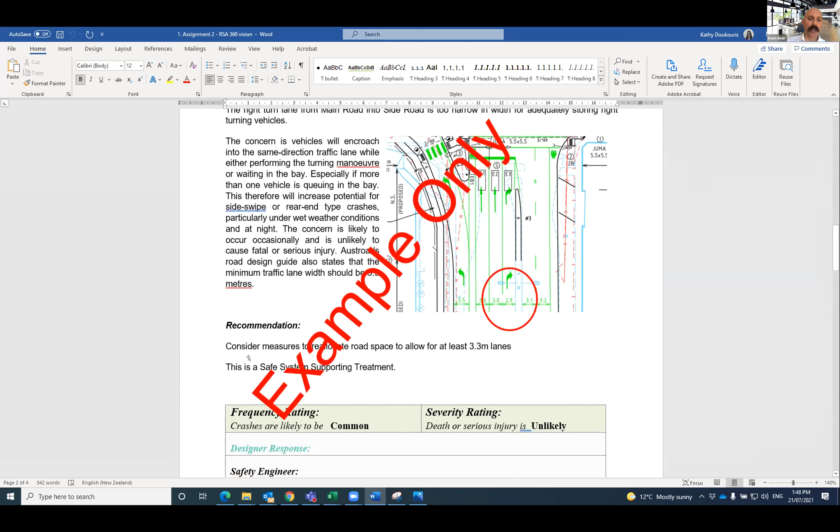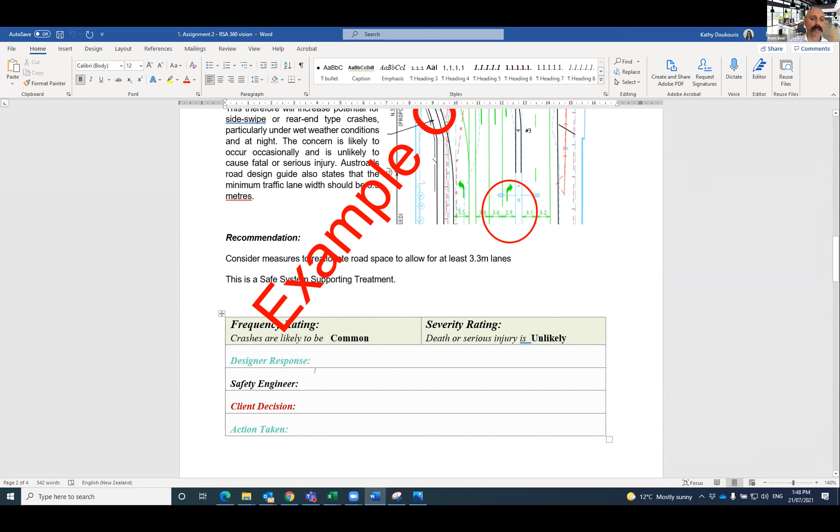Now, in that little box there, you've got to put how you've arrived at your risk. And so they're drop-down menus, but then you don't fill out the design response, the safety engineer response, or the like. So go down a little bit, and we've highlighted the bits we want you to fill out. So heading, subheading, write up the issue, recommendation, fill out the risk. And so there's 2 of those to do.

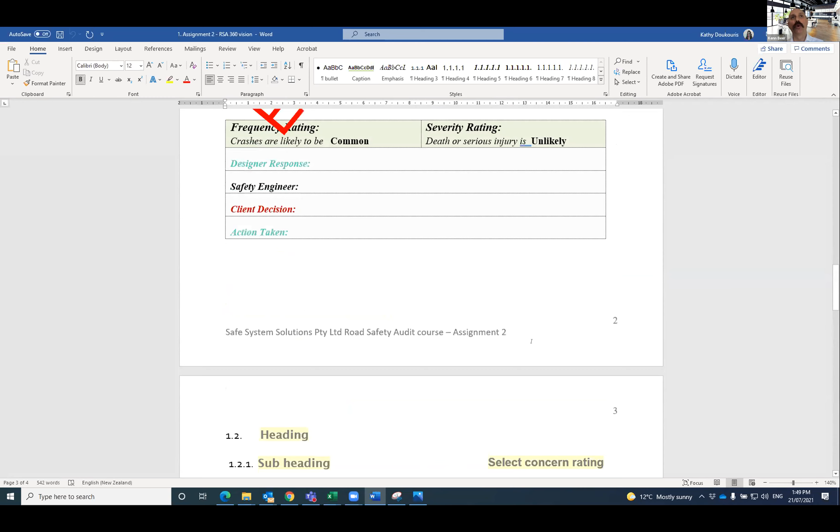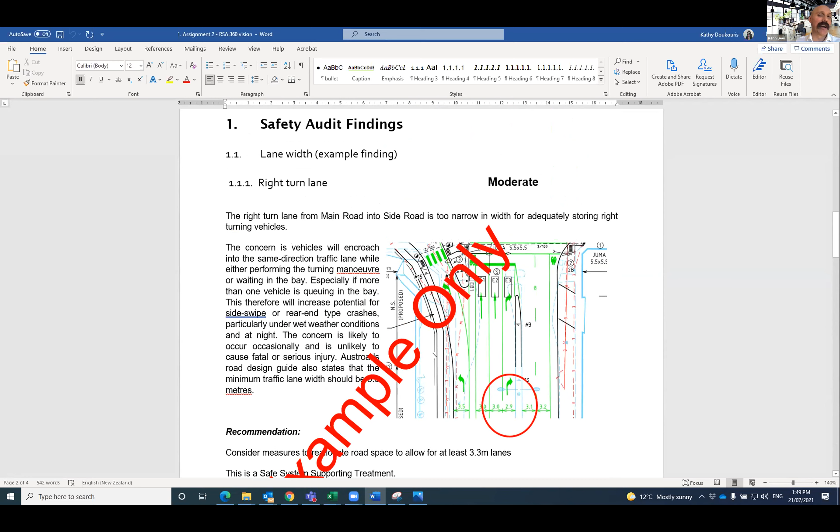So the last thing I think there is to show you: we've got the functional design, and this is a genuine design, all right? This is not fabricated for training purposes. This is moving forward to be built. So it's not like there are glaring issues. We haven't put in there a particular thing for you to specifically find. This is genuine, real stuff. And I like doing real ones because that's what you'll be doing as you go about auditing. So have a look at that and see what you can come up with. So it's 3 pages, functional design.

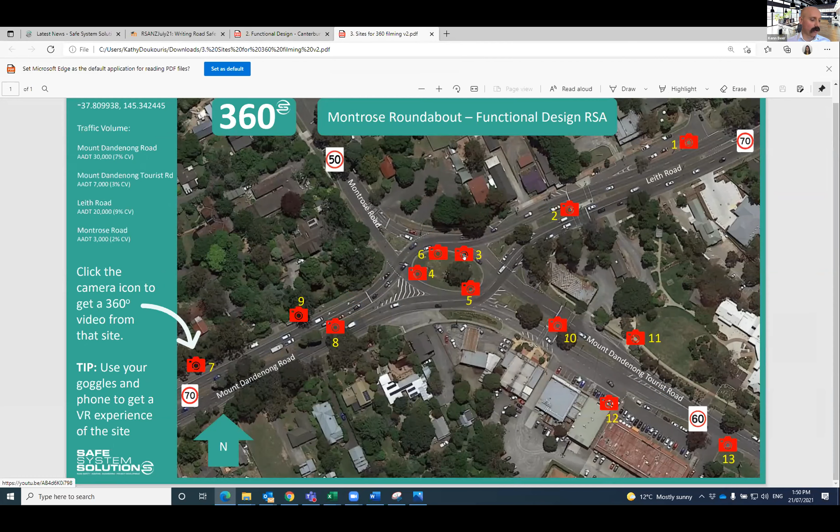And this is your other sheet. Each of those cameras represents a spot where there's about 2 or 3 minutes of video footage in a 360-degree format. So what you can do is click on that on your phone if you want, and pop your phone into the goggles which we provided. And then as you move your phone around, your head around, it moves the vision around. Now, if you don't want to put it into your goggles, you can just do it on your desktop the way Kathy is, although I'm not sure we're seeing that. Is that playing? Yep. So just the movement of your phone will move that around.

You can look up, you can look into the sky if you want, and you can have a look at the site, and you've got vision from all these different spots. Remember, you are auditing the design, not the existing conditions, but the reason you want to be able to look at the existing conditions is that you've got to think about how this new facility is going to interface with the existing road. You're going to link in what issues there might be as a result. But yeah, have a go with the phone and the goggles and moving your head around.

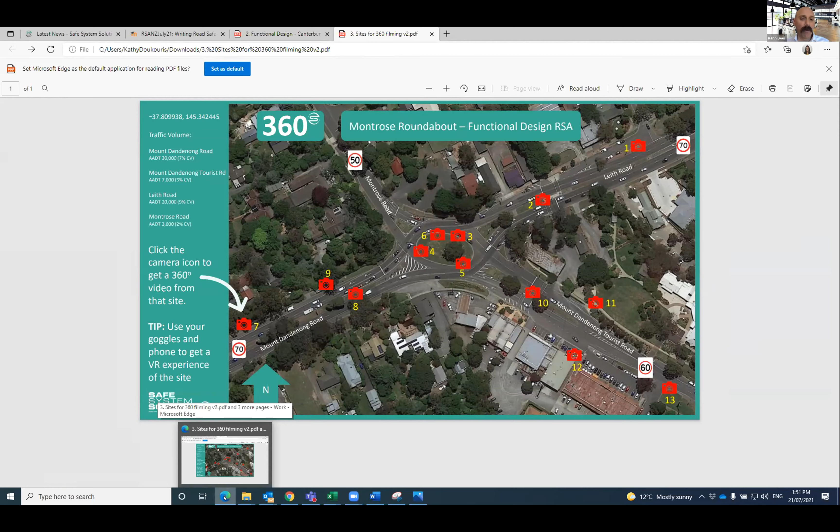The other little trick on that, Kathy, if you go back to YouTube, there's an important little trick here that will make your whole virtual reality experience far greater, is to go over to settings, or, well, if you do it on your phone, it's going to be full screen anyway.

If you go to settings, no, quality, and click on that and go to the top, 2160, right? That is going to make it a really crisp vision like you're there, if your internet's fast enough, which Kathy's may not be at the moment. But it'll crisp it up. And so when you've got your phone and your goggles, highest resolution playback, and you might get a little bit of a feeling like you're there. There we go, sort of playing crisply now.

And so you can either do it at your desktop just like this, or you can jump on, have a bit of a play around with the VR goggles. Get your kids to have a look at the site, and it's much safer than being out on site too, isn't it? Is that what you do, Ken? When you do play it on your phone, a little goggle type icon comes up. So you've got to click on that one. It is a bit of fun, and it's good for our little exercise because you can do it fairly quickly. And we only want 2 issues.